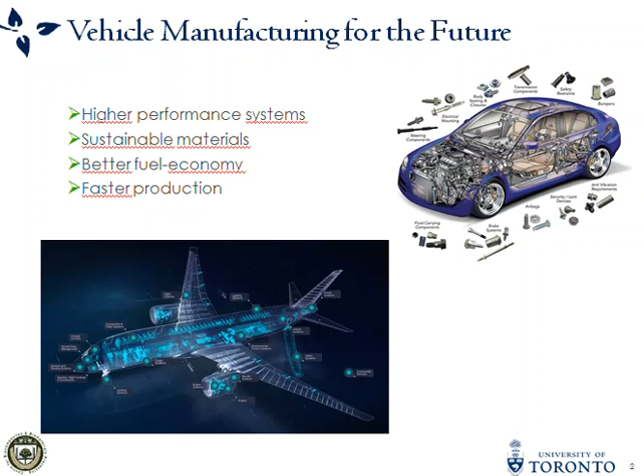Environmental control ducting systems are ducting systems in aircraft, and this is one example for which we can replace old methods of manufacturing with new ones which might have new benefits such as lightweighting, and there are other benefits to introducing 3D printing for these types of parts as well. These parts can be very complicated, and for a single vehicle there can be many different types of parts for the same vehicle.

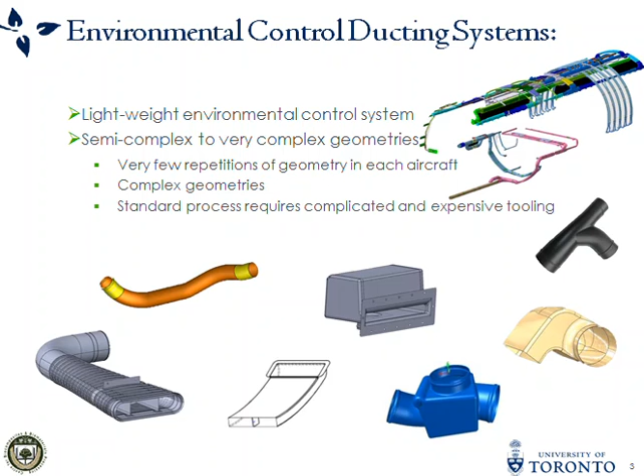Currently, to manufacture aircraft ducting, it's a very laborious process. First, the material has to be cut in sheets, then it has to be hand laid up by a worker into molds. Then these ducts are cured under pressure, then they have to be demolded, then they have to be trimmed and finished, and finally they have to have thermal insulation wrapped around the outside.

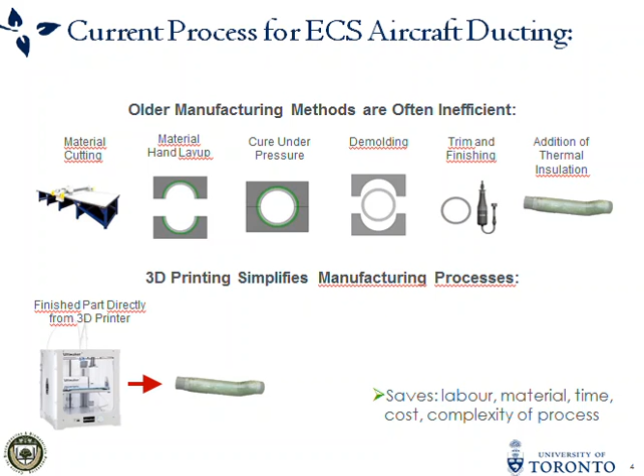But with new manufacturing processes such as 3D printing, maybe this can become a one-step process, and in the process, maybe it can even be a lighter weight product.

So these are some prototypes I've made of 3D printed ducting for vehicles, and it shows that you can use very complicated geometries and even create internal structures within the walls of the duct.

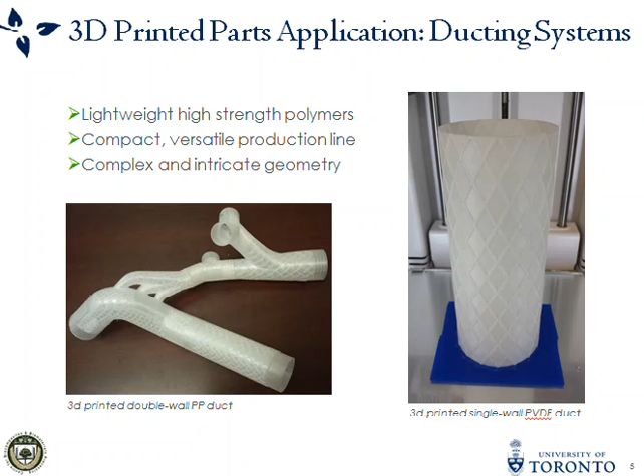With 3D printing, currently there's not very much research done on foaming from a 3D printer nozzle, but I'd like to introduce this concept and introduce some 3D printed foam ducts. Here are some examples of some that I printed myself while looking into this research.

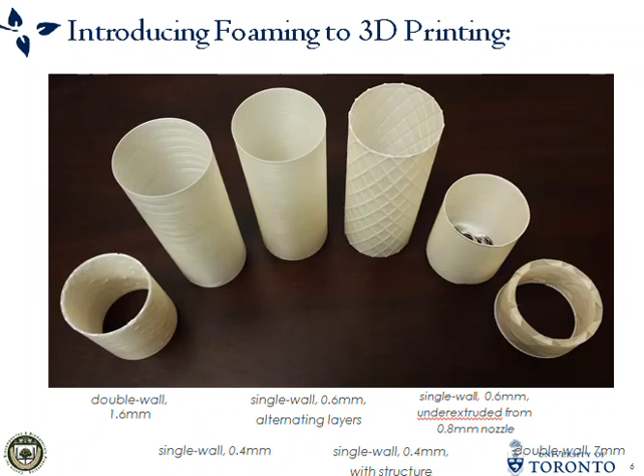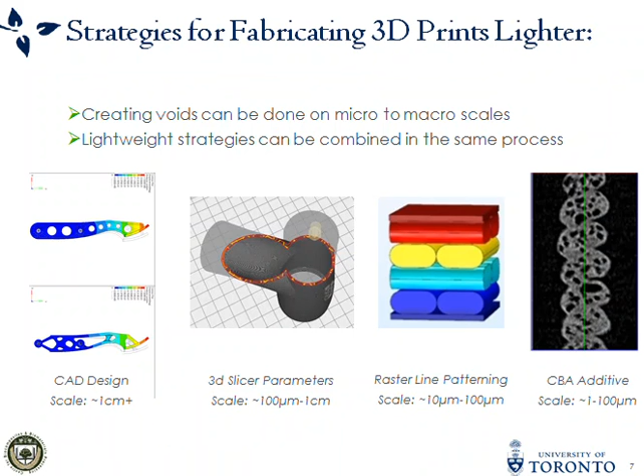So when we 3D print foam ducts, one of the benefits of 3D printing is that we can lightweight the ducts in many different ways. And we can do this on different scales, from a macro scale to a micro scale.

So here's a diagram I made of some different types of lightweighting we can do. We can use topology optimization to limit the amount of geometric material we use in a duct. On a smaller scale, we can use the 3D printer settings to hollow out walls in the duct.

In other words, you can have a double wall duct with an air gap in between instead of a solid material, since you can print internal parts in a 3D printer. Even smaller than that, you can create gaps in layers of raster lines that are being extruded. Each raster line, you can adjust the dimensions vertically and horizontally and how close and far apart they are together. This can leave micro structures and micro voids which help with the lightweighting process.

And lastly, and most importantly, which I'm going to be talking about most, is using a foam 3D printer to make very tiny micro bubbles.

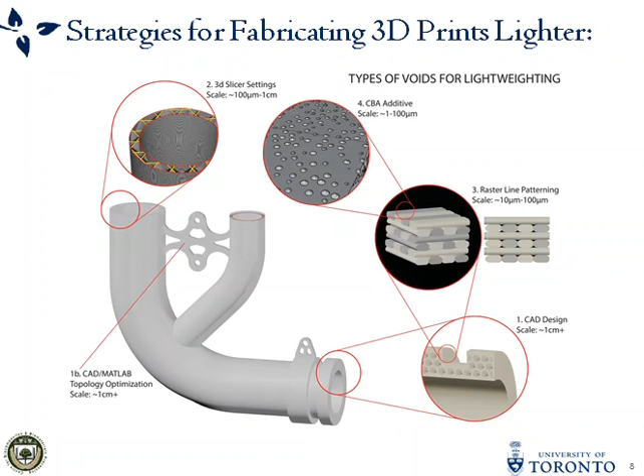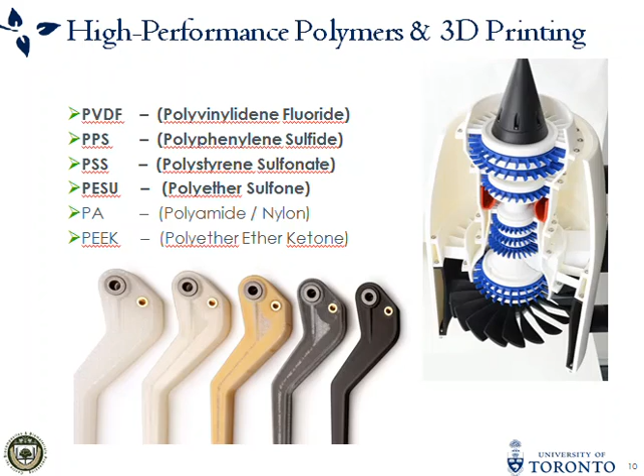So currently in 3D printing, there are many materials available, but not all of these materials are high performance enough for vehicle industry use. So the four polymers that are highlighted here aren't available commercially for 3D printing, so they need some research and development. These types of polymers provide many different types of mechanical properties that are very essential to high strength components for vehicles.

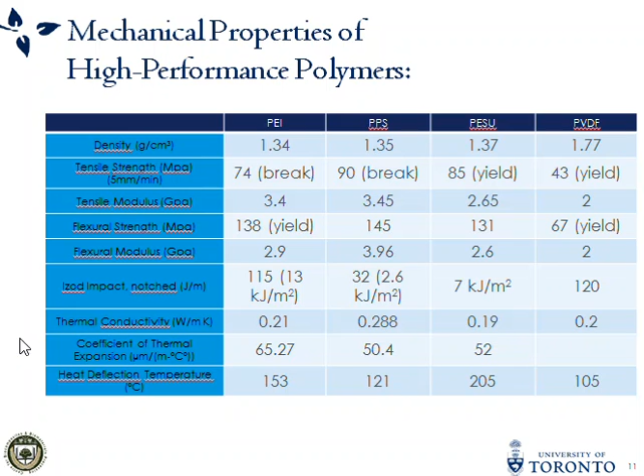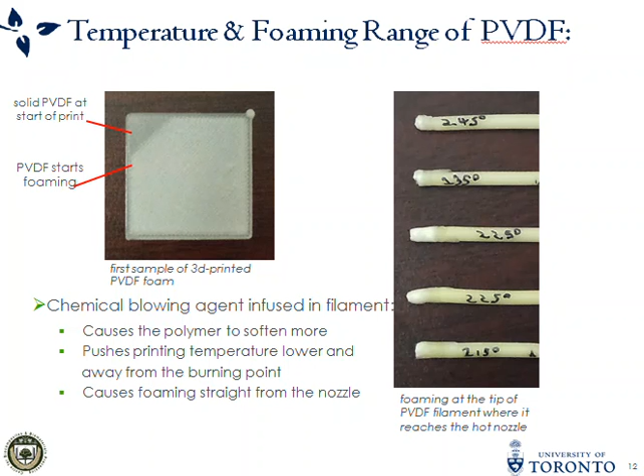So with foam polymers, we can start looking at structures we can make with foam. So to introduce foaming in a 3D printer, I've tested some filaments made with a chemical blowing agent infused, and they're manufactured in a screw extruder, and the chemical blowing agent is released at a higher temperature in the 3D printer nozzle.

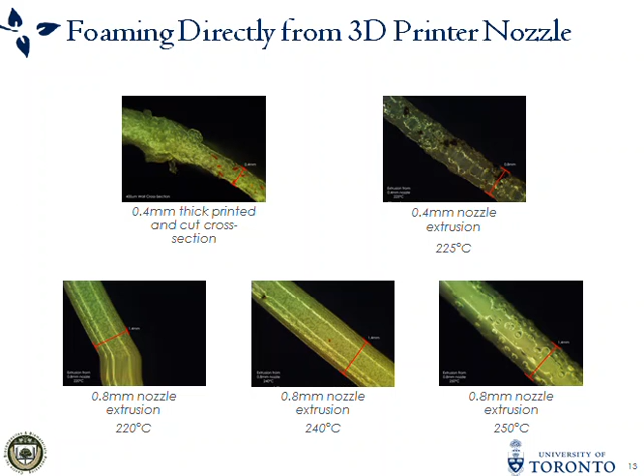So what we get when we extrude a string of this material out of the 3D printer nozzle, you can see in these examples the chemical blowing agent is releasing foam and is diffusing at different rates throughout the strand, and we can characterize this through studying it.

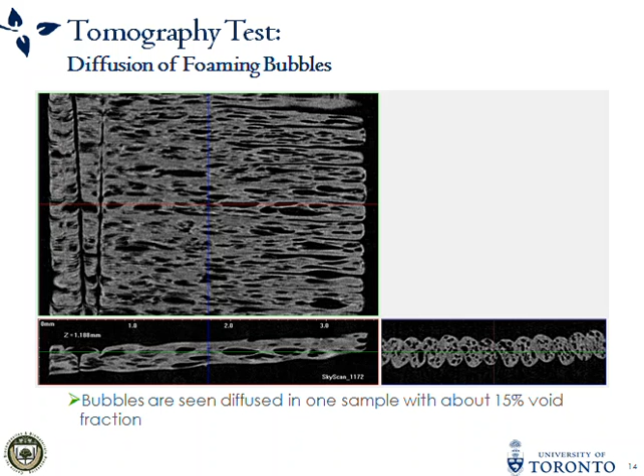Here's a tomography test I did with a sample of not just the strings but printed in a simple object. So you can see bubbles in all three orthographic projections, and for the first time we're introducing a foam from a 3D printer in an actual object.

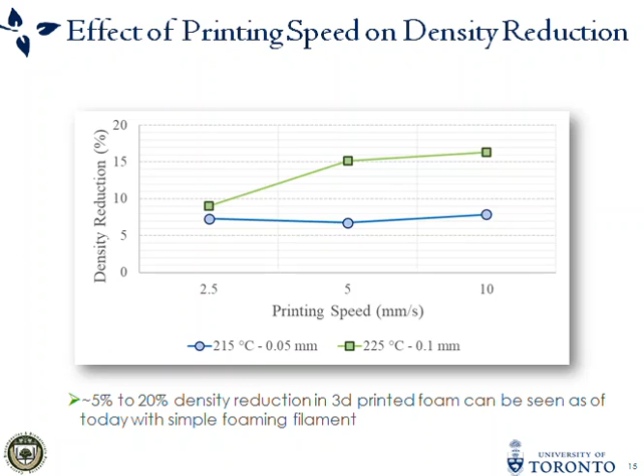So the chemical blowing agent that's released during this process is affected by a lot of different 3D printer settings. So one is printing speed. There's many variables that you could change in the printer settings, but there's a few very important ones.

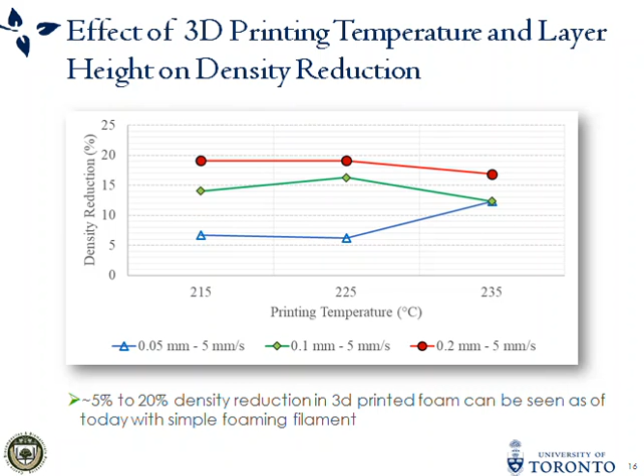Also, 3D printing temperature and layer height are very important. The temperature obviously releases blowing agent, and the layer height affects the compression between the layers and the nozzle while it's being extruded. We can also use different blowing agents.

So this means we can pinpoint different temperatures we want to release the blowing agent from the nozzle, and we can also possibly control the time, and we get a greater degree of material control from this.

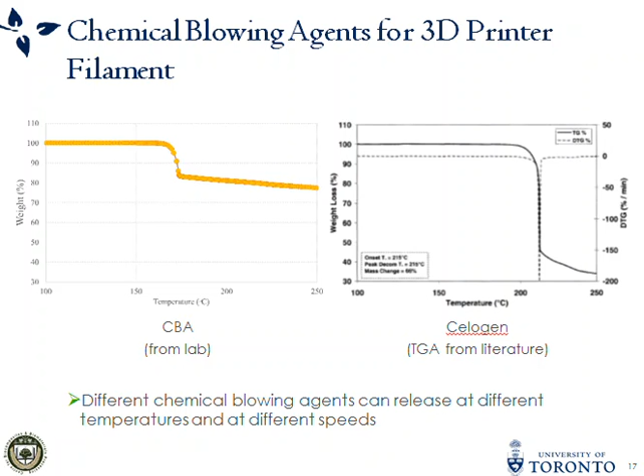Because if it diffuses very fast, it's such a short window of time, and it's a very small volume of material, that the gas can escape very easily. But my idea is to use a special process to concentrate the blowing agent at the core of the filament, so it has a better chance of diffusing properly while it's being deposited.

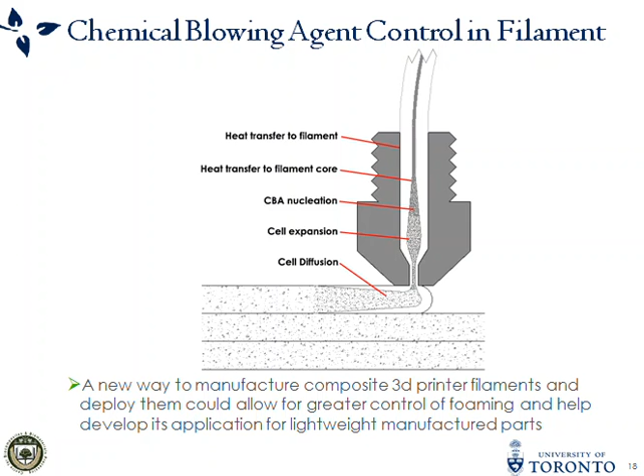So the two materials can even have two different blowing agents. They can have the same one in a different percentage. They can even use different polymers.

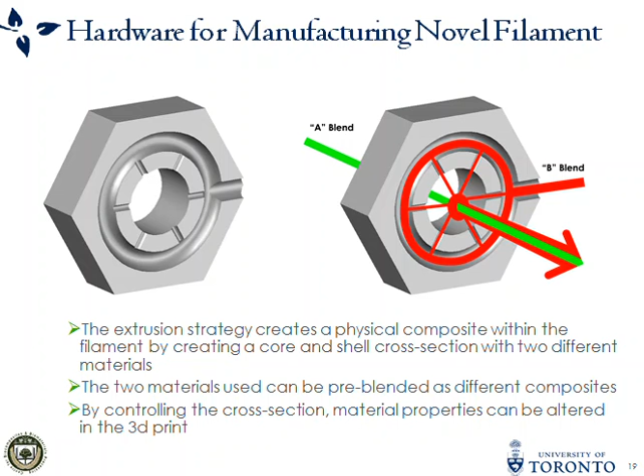So this would be a lower amount of chemical blowing agent, but in my experiments I found it's very difficult to print high performance polymers that are very viscous. So by adding some blowing agent into the shell of the filament, it actually allows it to reduce the temperature required for a good melt flow, and it makes the 3D printing easier.

So the temperature we would use in the process of making the filament would be lower so that the chemical blowing agent doesn't get released. But then later when we 3D print, we would use a higher temperature and pinpoint that the gas will be released at that part of the process, and we get a 3D printed object.

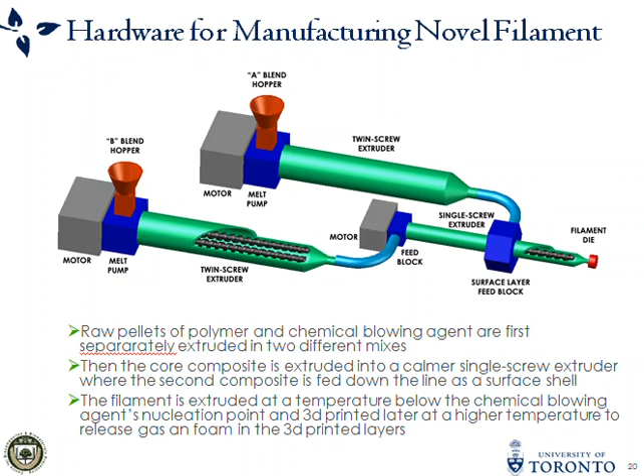And so, in conclusion, the future of automotive parts and aerospace parts, we could get lighter weight products and really optimize the material. Thank you.